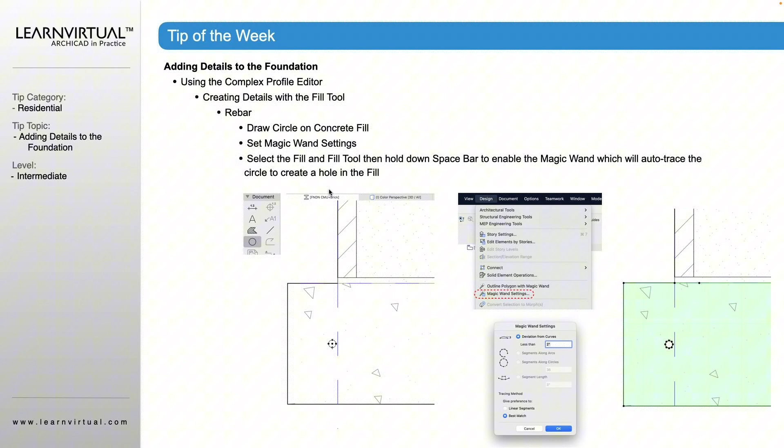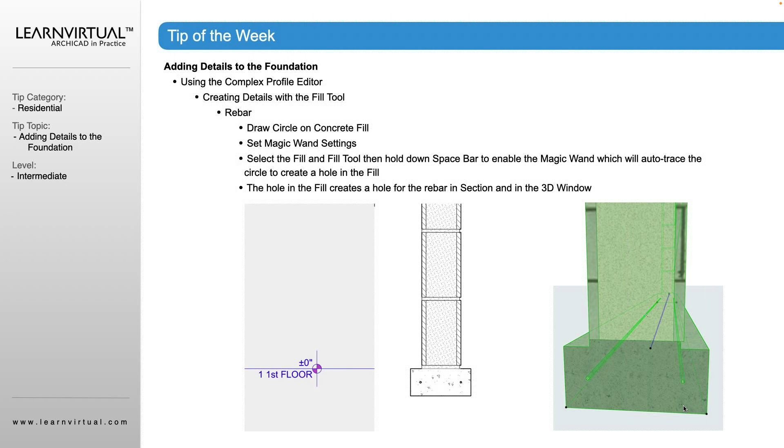Then you use your magic wand, basically holding down your space bar. That activates the magic wand. You click on the edge of the circle, and then it automatically cuts a hole in that fill. You can see down here where we've now cut that hole in the fill. And now we can see it go right through the building and right through our foundation. So that's kind of nice. We don't have to actually draw that rebar. We just do a hole, and that will automatically cut right through it.

We can also do the same thing with the framing that we might have at the top of the foundation. So in this case, atop the foundation wall, we want to have a 2x here. So what you want to do is actually draw fills, not lines, okay? You want to draw 4 triangular fills here. If we zoom in closely, you're going to see that we actually have 4 fills, and we make them really close so that when you zoom out, you don't really see these lines. All you're really seeing is what looks like a line when it gets created in a section.

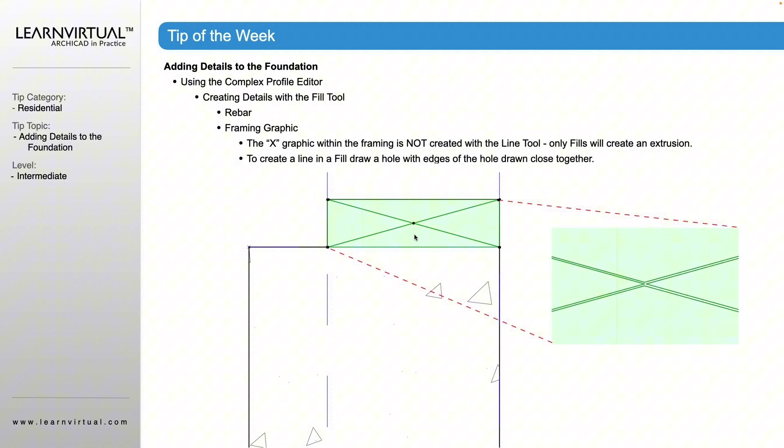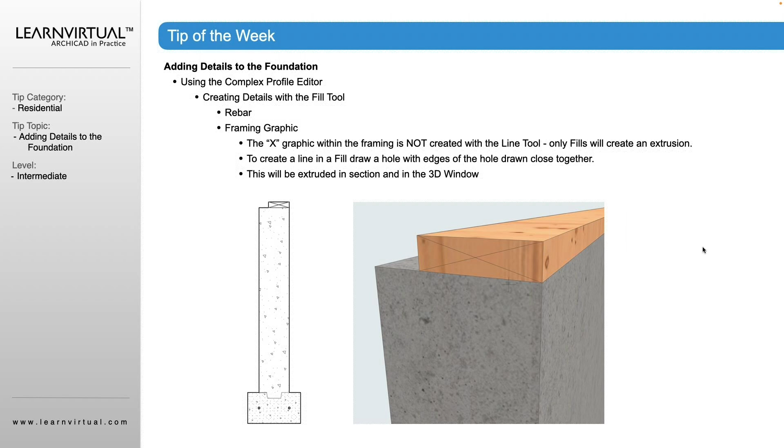So if I look at this, that looks like a line. If I look at this, that looks like lines when I do a 3D cutaway. However, these are individual fills that are getting extruded. If I were to select this one right here, it would show as an individual fill. So if you want your 2x's in a complex profile to show the framing as an X, then you need to draw it as 4 triangular fills, not as 1 rectangular fill.

And then finally, you also may want to add some detail to your foundation and structural framing. So this is a really good example. This is from one of our clients who's working with some of the Simpson Strong-Tie elements. He's gone to the Simpson Strong-Tie website, downloaded some of these elements, and placed them into his model so that he can show where his framing is being tied into the slab and the foundation. He can show where some of his bolts are securing the plates into the foundation, etc.

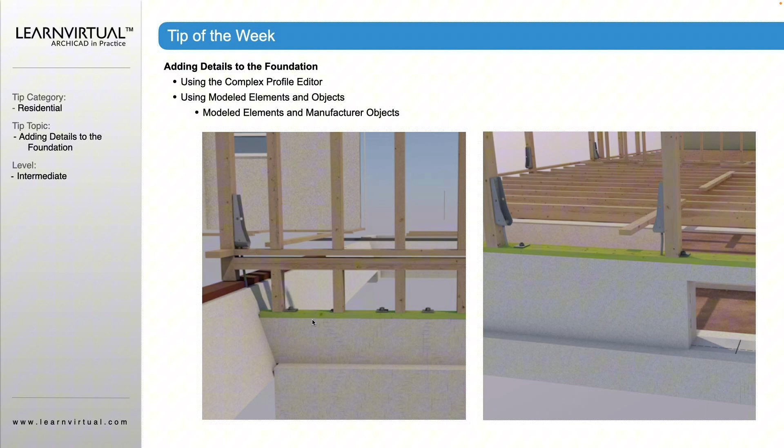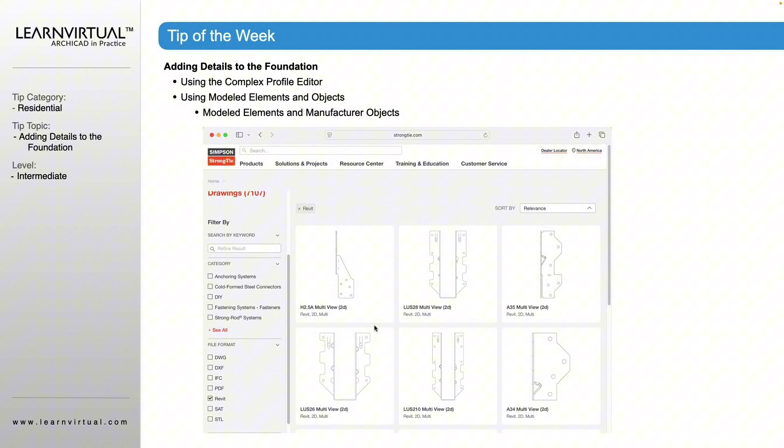And then you can click any one of these that has a Revit option, download that, and then open that into Archicad. Go to the File menu, Libraries and Objects, Import RFA as GDL Object, and then it'll bring it up, go select it, and then you can open that up and place that into the model. And that is our tip of the week.